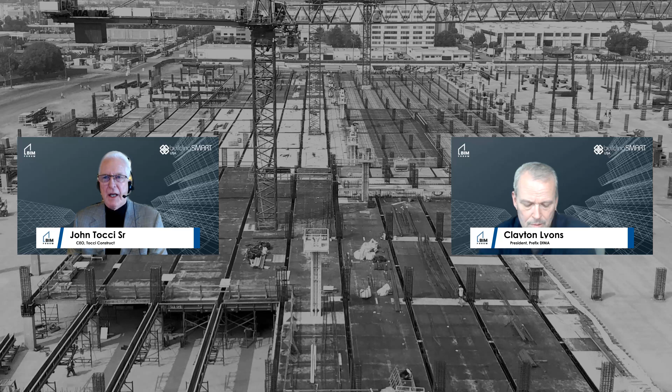So we are talking a lot about some of the case studies that Clayton has been involved in. In doing so, we want to say that this is not to highlight any one person or one firm, but this is just the best example of real DfMA that we have among several of us that have worked together with him. And with that caveat, we push on.

So this is a slide that we introduced at the BIM forum in the face of about a dozen more that talked about how badly we sucked back in 2010. And I still use it because we still haven't gotten our train, in my opinion, back on the track fully.

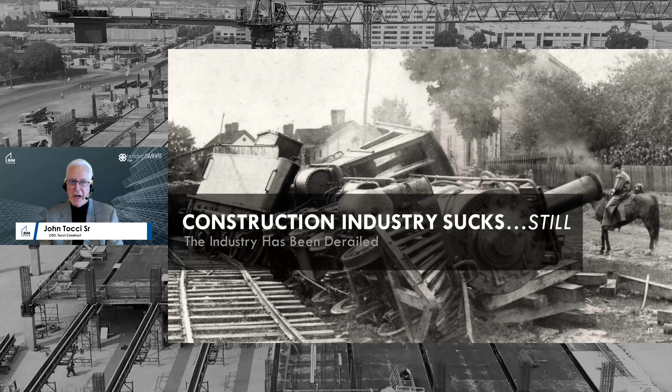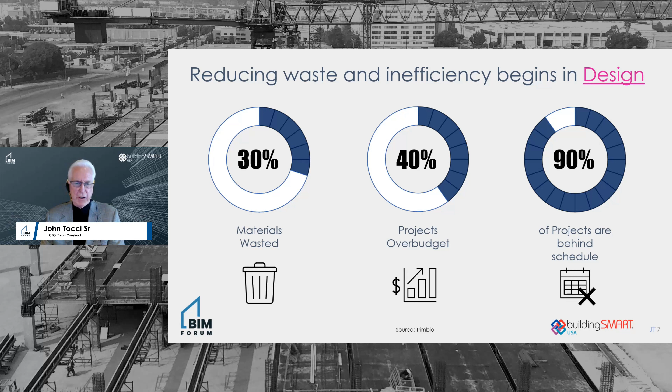This is what we're talking about even today: there's 30% waste in materials, 16% of that is actually new materials. 40% of projects are over budget, 90% of projects are behind schedule. So few projects finish at their starting budgets that it's an anomaly. So we need to get better, and this is about getting better.

So we talked at the beginning about the whole idea here being bringing craft knowledge into the design process. But isn't that means and methods, and don't architects traditionally shun getting into means and methods, traditionally thinking that architects do not have the responsibility for means and methods?

This comes from the standard owner-architect agreement, the basic AIA B101, and there's the statement right there about not having control over, charge of, or responsibility for construction means, methods, techniques, sequences, or procedures. But this statement is in the construction phase services. There is no statement like this in the design phase services.

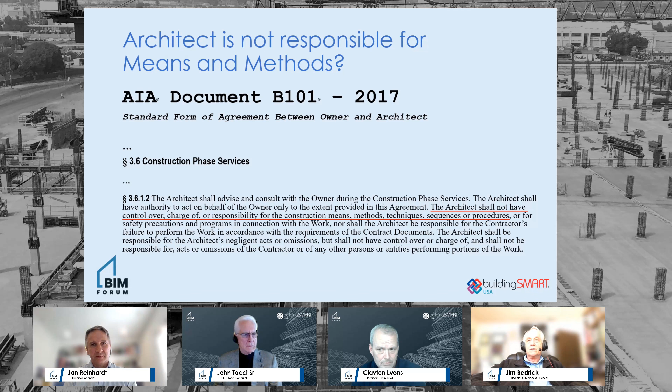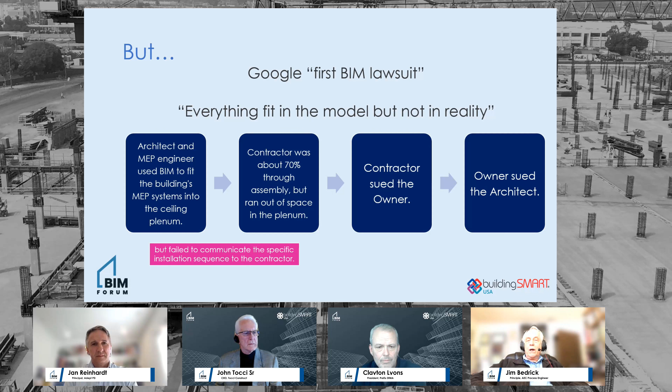So you might think that architects are not supposed to be delving into means and methods, but next. If you Google 'first BIM lawsuit,' that quote right there, you will find an article by Nadine Post from about 2011 on a laboratory building where the MEP systems were designed so tight that they could only be installed in a certain sequence.

Well, the architect failed to apprise the contractor of that sequence. About 70% through, the contractor ran out of space and couldn't get anything more in. So, following our beloved Spearin doctrine, the contractor then sued the owner because he didn't like the drawings. The owner then sued the architect, and the insurance company brought the engineer in and sued him too.

And you might think that this was means and methods, that sequence which was specifically listed in the contract above as something the architect doesn't have charge over. But the architect, the engineer, and the contractor all ate some of the judgment. So we architects and designers are already held by the courts responsible for means and methods. And that's where we want to bring the craft knowledge in, so we get the means and methods right.

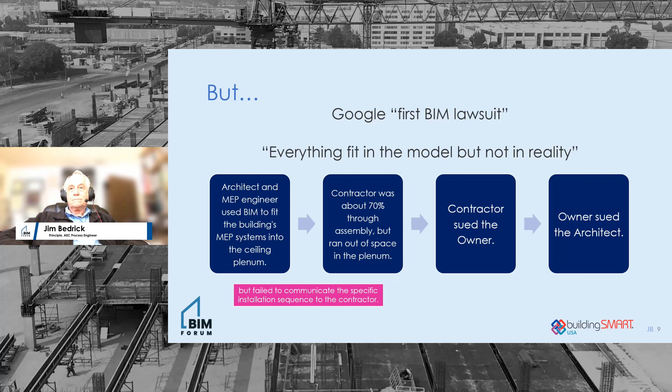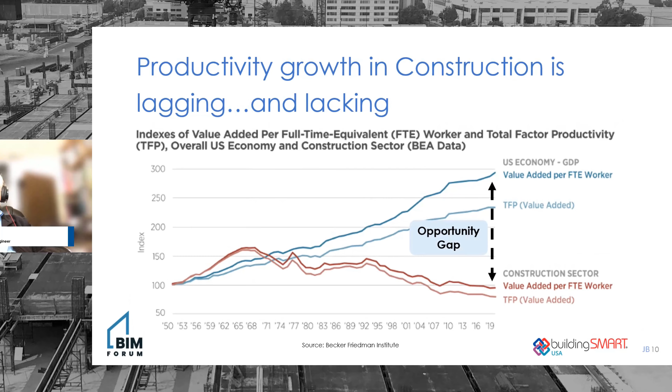We still do one-offs. Boeing will design an airplane and then build hundreds of copies, so they can invest a huge amount in upfront design, making sure that every nut, bolt, and electrical connection works. We can't. The economics of our industry can't possibly support that amount of analysis at the beginning. But there is a huge opportunity—we can certainly improve our productivity. There's a big gap here, and that's an opportunity for any company that does improve it.

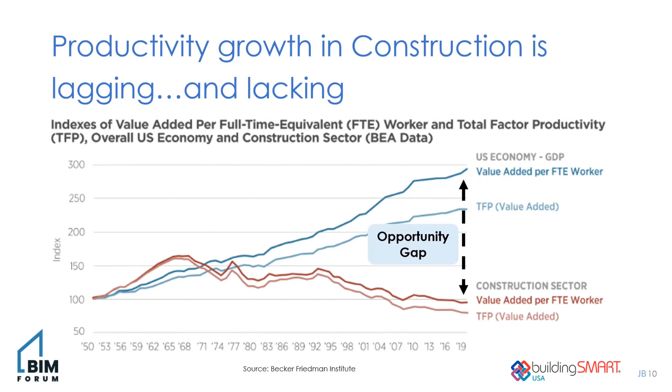The second caveat is we've all seen the traditional wisdom of cost, schedule, and quality—you can only improve two of them at the same time, you have to sacrifice the third to pay for it. But the fallacy is that this assumes we don't do anything new. If you look at productivity, that's cost and time—does that mean we can't improve productivity without sacrificing quality?

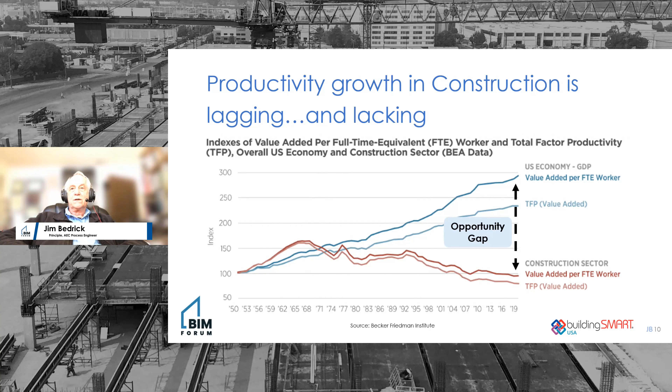NASA managed to come up with a process of doing better, faster, cheaper. That is something we can do also, and that is where DfMA comes in—it can turn that conventional wisdom on its head.

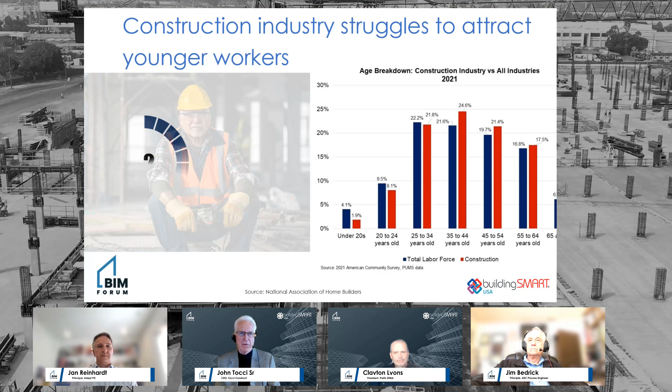So they give this to the old guy to say, a rapidly aging workforce and a strained labor market. This is really true, and we all see it and know it. It's a drain of all the experience at the craft level. Not all of it, but much of the experience is retiring and walking off of our job sites, and we're not attracting the same type of interest from younger people.

This poor guy is sitting between these two graphs and feeling pretty dismal about life. I'll let the graph speak for itself because we're talking too much and we've got to get into the meat. So this is good.

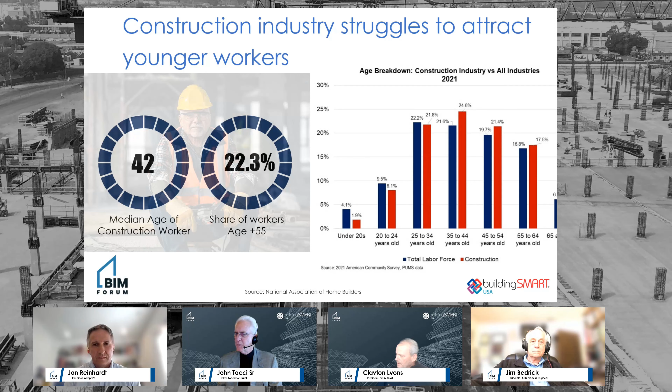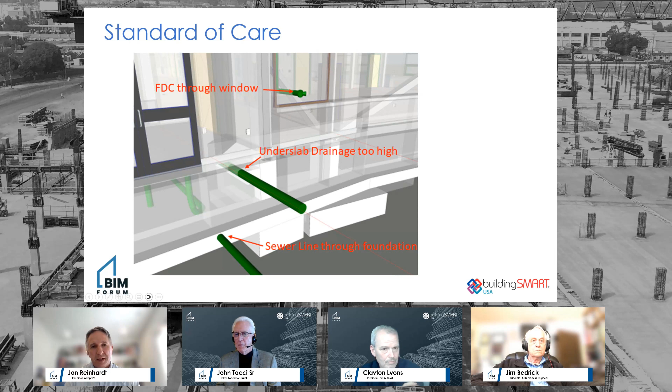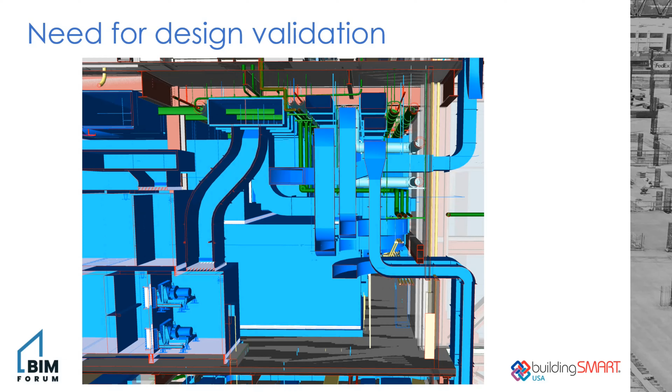That design wasn't constructible, but it's also definitely not optimized. And the quest before us is to see how can we optimize things at the right time, when it's easy to do. This is what we are exploring here today.

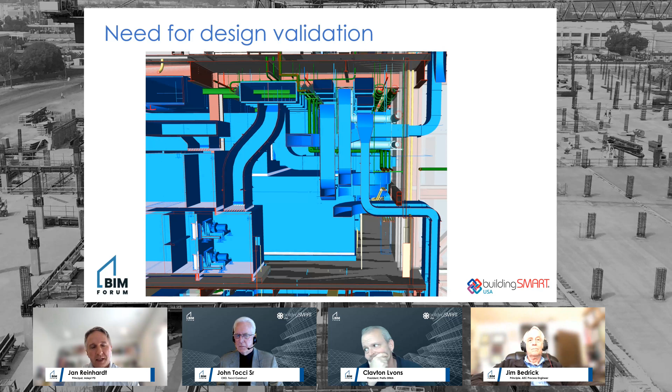So what the heck is DfMA? It's design for manufacture and assembly. It's the combination of two discrete standards, design for manufacturing and design for assembly. It's an industry agnostic design approach that prepares and optimizes components for streamlined manufacturing.

Think manufacturing informed design, which is becoming another acronym, MID. Think about looking at design through a filter at some point, earlier rather than later, about what parts can be prefabricated, what parts can be aggregated into components, and how much of this work can be fabricated offsite where it's safer, cleaner, smoother, and more efficient. You'll have captured most of the essence of DfMA.

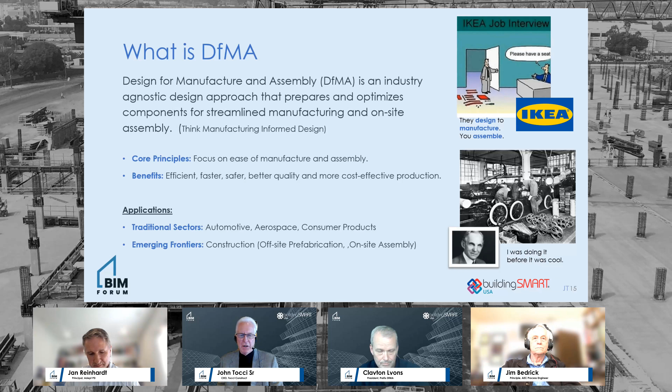We know it every day in all of the manufacturing sectors. Now it's coming to a project near you. DfMA, I'm going to keep, even though my name's not on it. Okay, DfMA reduces design effort when it's done properly.

Craft specialists infused into design in late SD at the latest, throughout design development and into CDs, help make decisions, choose parts and pieces, fittings and hangers and clips, all the things that are important that need to be in a complete design.

So this is a little example of a DfMA approach on one hospital project. Clayton, why don't you talk about the setup that you encountered and that you improved? Hold on, let me take myself off mute first there.

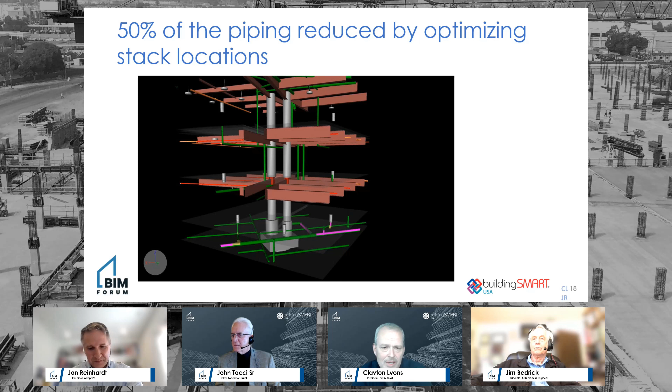So go to the next slide, Mark. We can start talking about some of the things. So we embedded with the design team on this project, an A&E firm, and this was the original, early SDs, late SDs, DDs. We started to integrate, incorporating value coordination, which is one of the things you want to incorporate into your drawings, getting more horizontal or leaner piping system.

In this case, it's a giant plinth, a lot of curves to the building structurally, curtain wall wise and everything else. As we were going along, we were able to remove 50% of the piping on the plinth areas, which is 3 levels, and 31 potential RFIs per stack. Then, of course, a total of just in the plinth area, 900 potential RFIs.

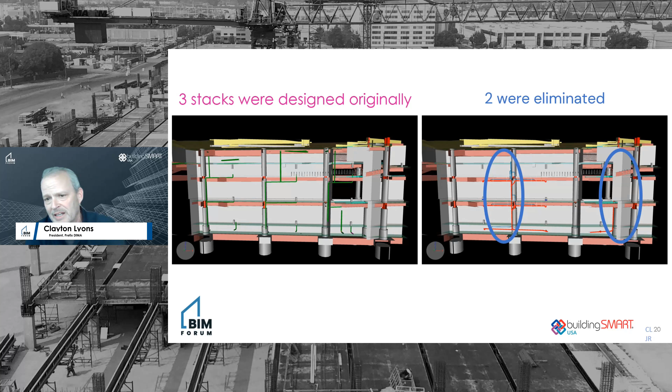I want to jump to the next slide. As you can see here on the left side, we had 3 original stacks. We went with individual venting, eliminated 2 stacks, which you're seeing on the right side. This is all before the subcontractors are on board. When the CD sets, this was incorporated into the design CD set, and that's what the subcontractors estimated off. So it created a much leaner and shop drawing ready process.

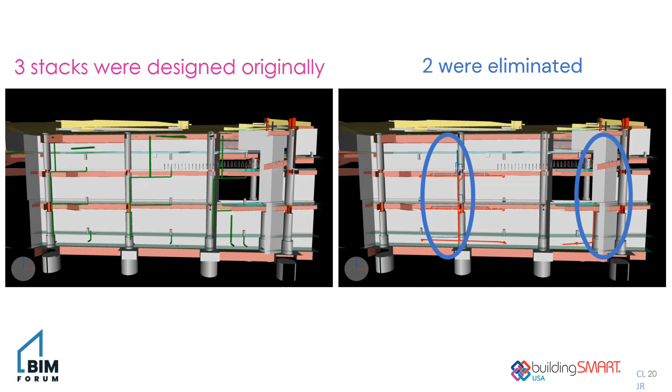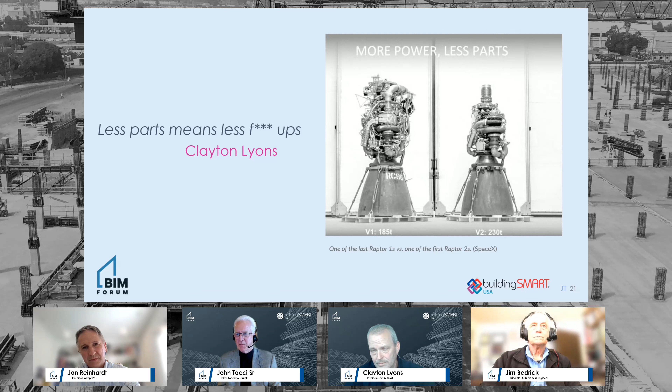That goes back to John. Okay, so what you're seeing here is 2 versions of the Raptor rocket engine from SpaceX, version 1 and version 2. This image captures one of the essences of DfMA: fewer parts, leaner, fewer things to go wrong, in Clayton's language. Go ahead.

So the core principles are infusing craft knowledge into the design process, fewer parts, aligning component tolerances with manufacturing capabilities. Let's try not to design things that can't be built unless you really have to. And then simplify assembly, group assembly, and find a way to make it so that it can only be installed one way. Lefty loosey, righty tighty.

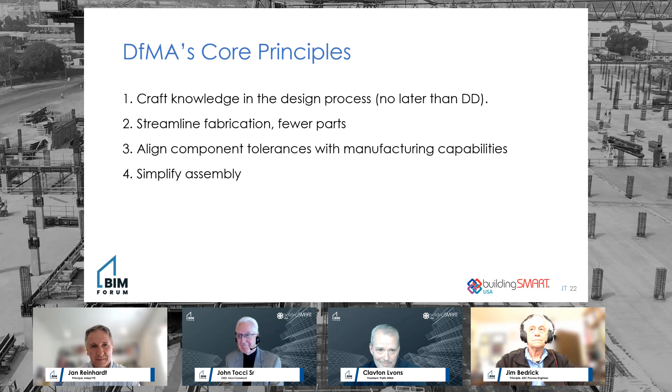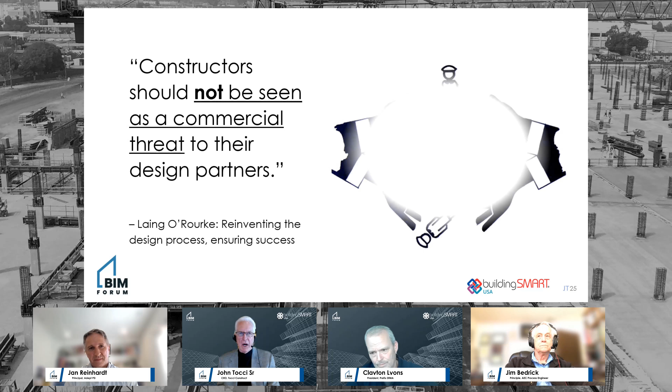So it really is about collaboration, not competition, especially with the design team. We're not criticizing, we're complementing and completing.

So now where are we taking that with DfMA, John? With DfMA, you're doing it even more intentionally. Another cliche that has developed is we need to go slow at first to go fast later. So we drag, or rake, that effort forward. Whatever can be pre-designed, whatever could be thought through, whatever can be detailed accurately in a way that doesn't have to be redone because of some proprietary system or extrusion or other part or pieces. Anything that you can do to design with good practice and as complete as possible is what we want to do, because we will improve the overall performance dramatically.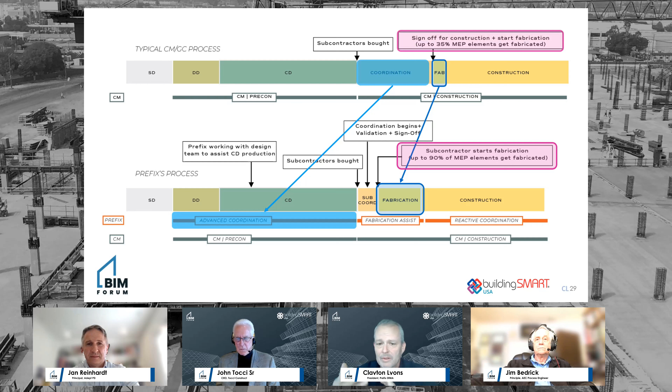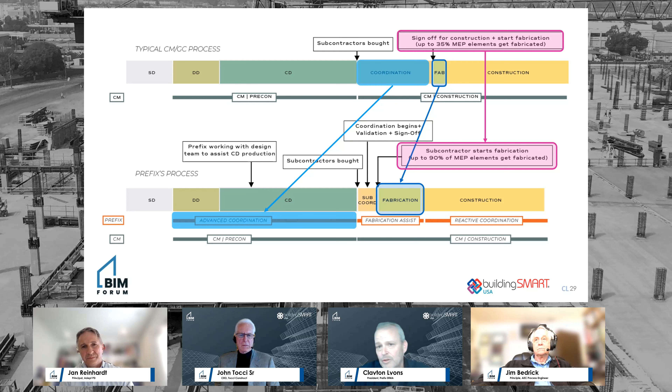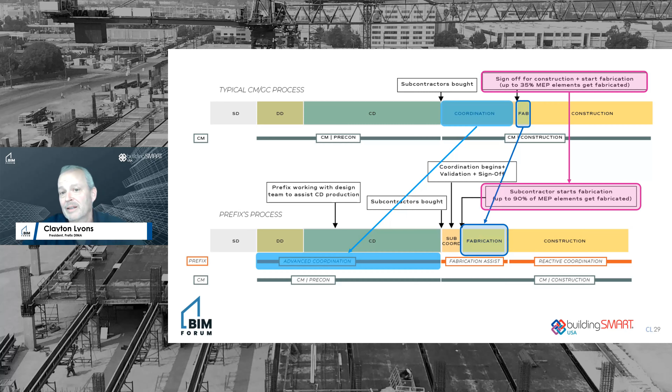The bottom is what we're performing now, where we're taking in vetting with the designers, the architect and the engineer, as part of their team. And in parallel, we're creating a set of fabrication level or shop level drawings that we can go out to the subs on purchasing. So on the bottom chart, you're now looking at the subcontractors to purchase. We've got a longer, bigger fabrication stage, and construction can be pulled back in a couple of months. So one of the biggest things to call out here is fabrication. It's offsite, and it's a third less of the man hours required than doing it in the field. So if we're doing a third less labor on 35% being fabricated offsite, and go up to 85 to 90% fabricated offsite, we're looking at a much better going out to bid, getting the owner the price that is incorporating that one-third reduction in labor.

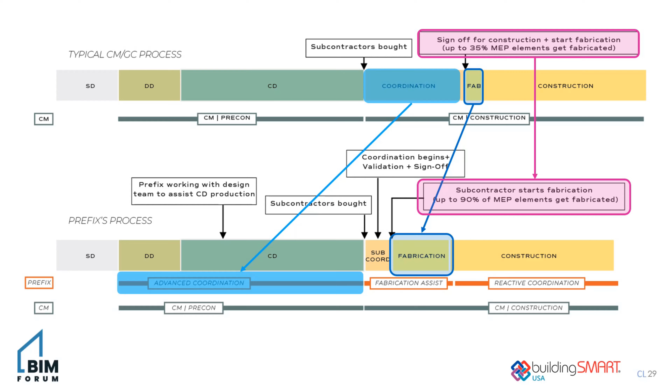Fantastic. And as Clayton mentioned, these are really important methods, and they're used in other geographies around the planet as well, specifically in the UK, Northern Europe, and the Nordics.

One really strong example of using this method is Laing O'Rourke. About 10 years ago, they made the decision to commit to DfMA and stated that they wanted to achieve targets of using 70% of the design elements using DfMA as part of their process. They wanted to reduce labor by 60% and shave 30% off of overall schedules. And to the best of my knowledge, they've actually accomplished that.

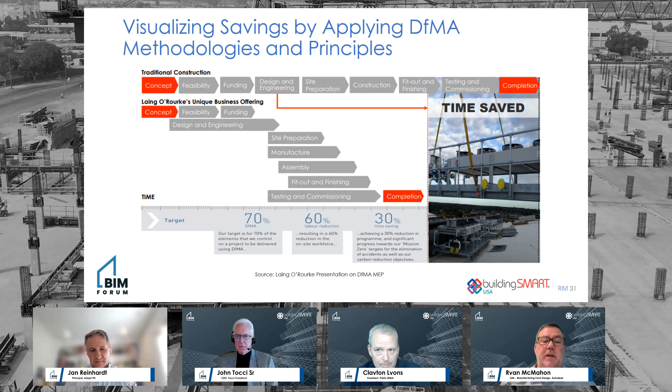They built a $200 million factory in the Midlands in the UK for precast concrete panels and components. They can support a huge amount of variation of each one of these elements, but all of them follow specific manufacturing rules and have very clear constraints so that they're always known manufacturable. And in their process, their designers have to seek to use these predefined components as part of any design solution, and they have to get an exception to go outside of using those regular components.

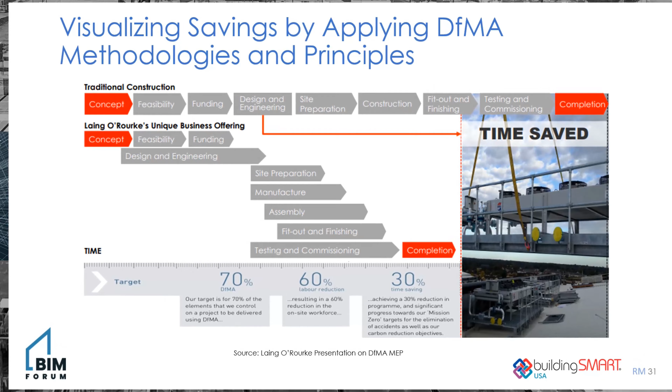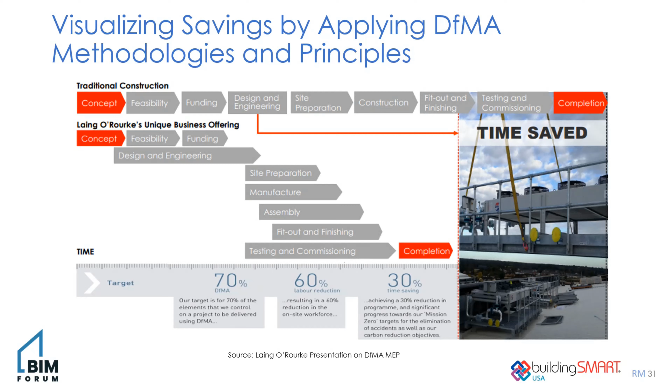And in this way, they've achieved these objectives that they called out here. Laing O'Rourke is one really good example, and you can see all kinds of stuff on the internet about what they're doing and see videos of their factory. But there's plenty of other examples. Goldbeck and Max Bogl in Germany are doing similar kinds of things and getting similar kinds of results. Another couple examples are Mott MacDonald and Royal BAM in the UK as well, and there's a ton all over the place. And now we're going to dig into another example.

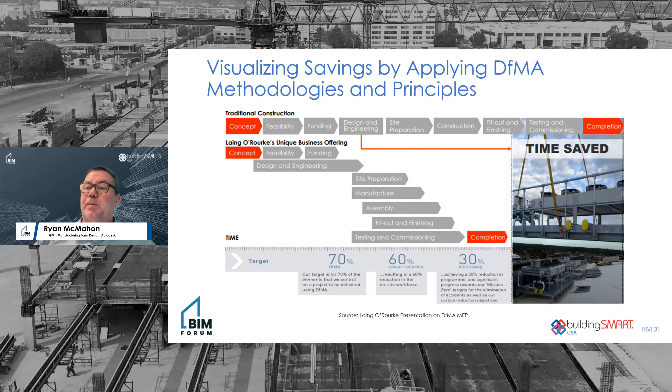So let's go back to the East Coast. This is our hospital project that we started to introduce. And what I want to say also here is there is no rocket science to this. This is traditional software. These are skills that are available. We just need to configure our approach, how we execute this project so that we take advantage of these opportunities.

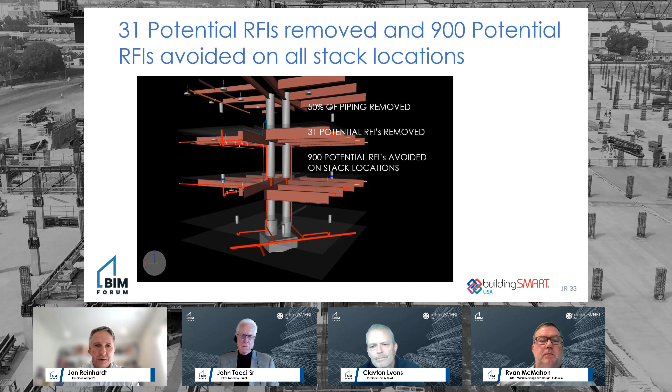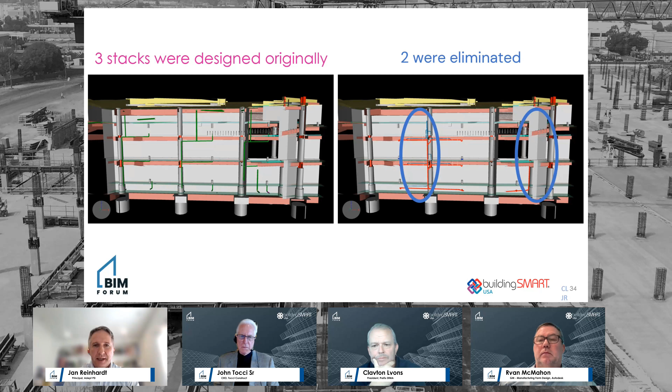The savings that were accomplished on that particular project are significant. We've looked at that at the beginning. We'll go through here. Clayton, why don't you continue talking about that project? And also, just so you know why Jan's talking to that, he was actually there.

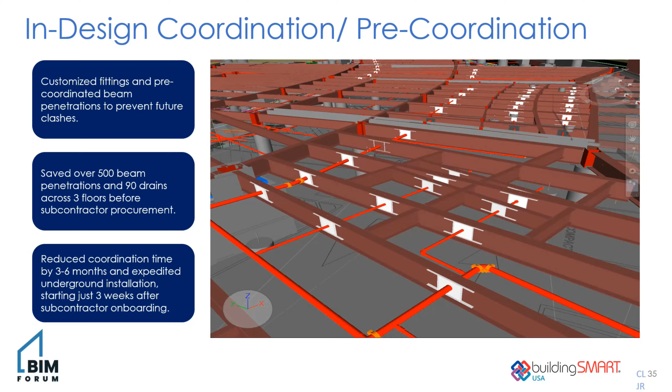So one of the things, we saved 500 beam penetrations. There were like 800 beam pens that were required. This particular building has 5 different curves to it, structurally and curtain wall wise, where it presented some really heavy challenges. So for fitting a dry system into the lower levels, in order to hit the beam penetrations that were needed, we would have had to have about 30 drains per floor for swing joints. What we ended up doing in order to keep it straight was we mitered a 45, welded on 2 grooved ends so that we could get 1-2 degree bends and stay level and pitch.

So let me interject here. The significance really is that this all happened at design time, right? This was at the time when you could buy beam penetrations for a penny and where you had all the flexibilities to make changes to the structure. Correct. No structural subcontractor had been purchased yet. We're still just getting into late DDs at this point. So we're able to actually fill in some of the gap on design.

So this is what ends up going out into the architect and engineer's copy, into their CD set. Now we're going out to the street much leaner. So this is what—can I just add something, Clayton?

Yeah. And that is that this is what we're talking about, infusing craft knowledge into the design process. Most designers didn't even know that they had a problem. In fact, most CMs didn't even know they had a problem. But the craft knew that this was going to be a problem because you needed drains at each one of these locations, and you were going to have a serious issue in this. But bringing the craft in, dropping it in like a parachute at the right time, solved the problem that people didn't even know they had.

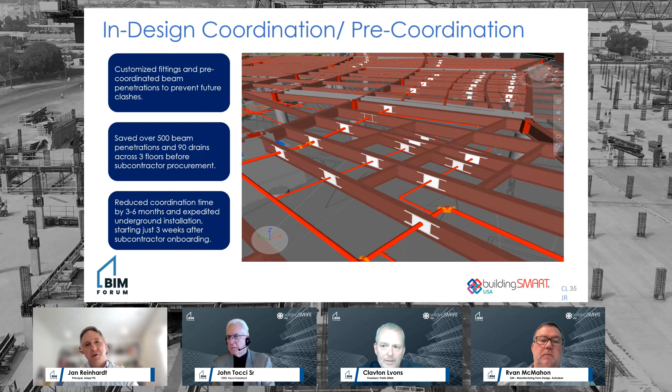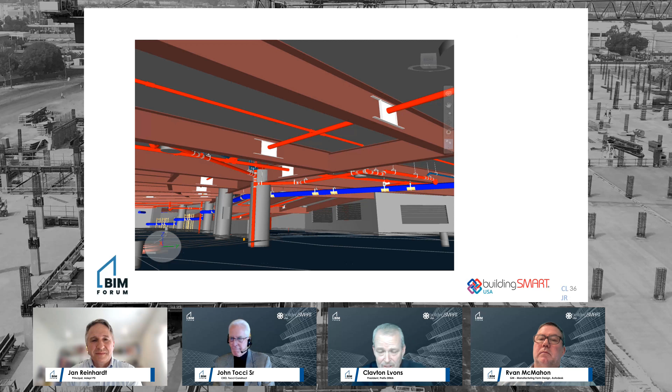In the traditional process, we will never know how expensive it is because we buy it expensive and we never compare. On this particular project, we actually upsized 60 beams in order to keep the drive lanes, and that was prior to the steel subcontractor purchase as well. But this is what goes out to the subcontractors to look at: the hangers, the nuts, the bolts, and then they take it and they go into installation. So we're purchasing them much cheaper, and we're also, because we're doing this, we're incorporating value coordination.

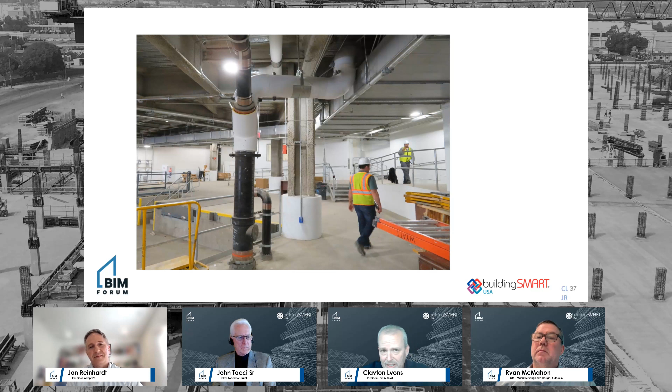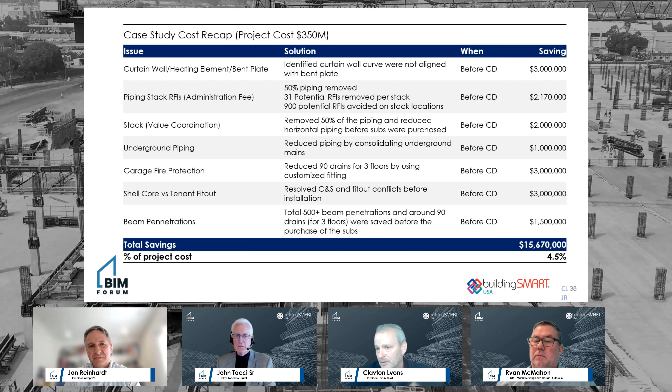Value coordination can yield much greater results than value engineering can. In this case, these are the things that we fleshed out on this project with bent plate, because it started off with curve plate. We suggested, because of the way the elements—the fin tube and everything that was in the curtain wall—that we go to straight 5 footers, 7 footers at each knuckle, underground piping. So total cost, 4.5% upfront savings on the GMP. Next one.

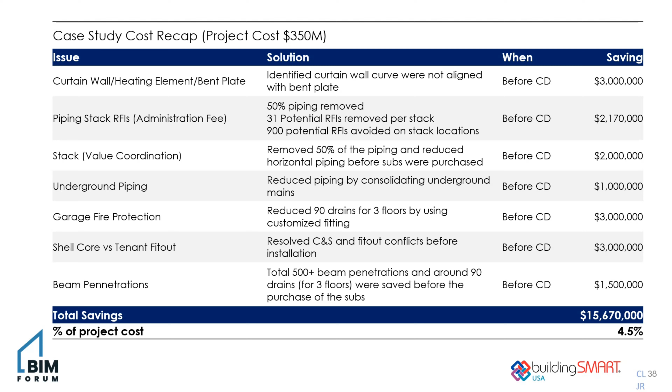What did I go to soon?

Okay, we're going to talk quickly about a case study that is currently under construction. This is a Tocci project in the Boston area, about $110 million project, 250 units on 3 stories of podium, with a robust program, mixed-use program underneath it. Go ahead, next slide.

What happened here was piping was redesigned and rerouted. We eliminated all dropped ceiling requests and requirements, and we even eliminated bump outs in corridors and around units. Reduced piping by 25% across 3 levels, prevented change orders, eliminated delays. In fact, the project is running 7 months ahead of schedule.

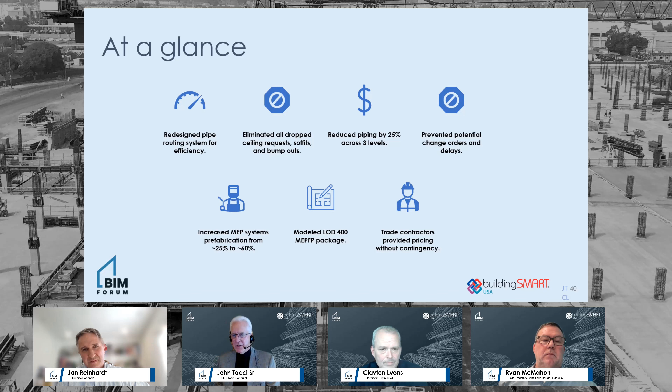We increased MEP system prefabrication from 25 to 60%. Our goal is to get it higher. And we modeled to LOD 400. And no contingency was tapped. So how did this happen? We do have a magic project, Mr. Tocci.

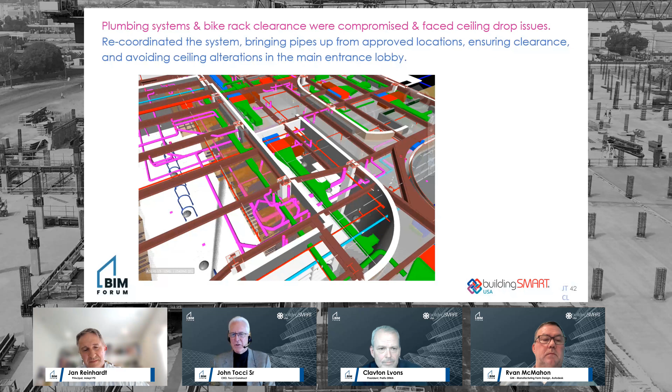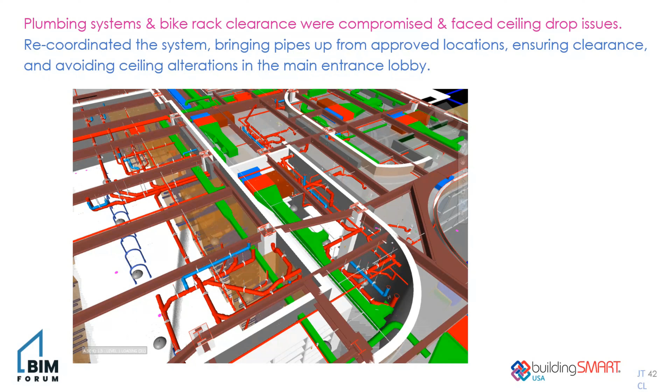So it's the standard spaghetti and mess and crowded interstitial spaces. We don't need to go into the details of it, but the difference between DfMA and regular coordination is number 1, when you do it, and 2, how you do it. It is done with the thought of optimization, not just straightening out a bowl of spaghetti. It's to question how much of that spaghetti do you really need. I realize I'm using kind of informal language, but it really is true.

Overall the project, and we're showing you one of the better grouping of bays, but across the entire building, we reduced piping by 25%. One of the key elements there is the fact that on the left, they wanted to drop all the ceilings. That's correct, and that was a battle for a couple of months. And then we changed the underground in order to... I'm glad you mentioned that, because that's what I was going to say.

It's not just moving pipe around. It's thinking outside the box. It's bringing the craft in. And by the craft, I'm not talking about VDC, as much as I love VDC. We're talking about people that actually know how to hang pipe and actually know what you need and where it drains to and what the code requirements are for drainage and drainage area. In this particular case, the outlets were revised, the underground was revised, everything was revised and optimized. So getting rid of stuff is actually more important than putting it in the right place or a convenient place.

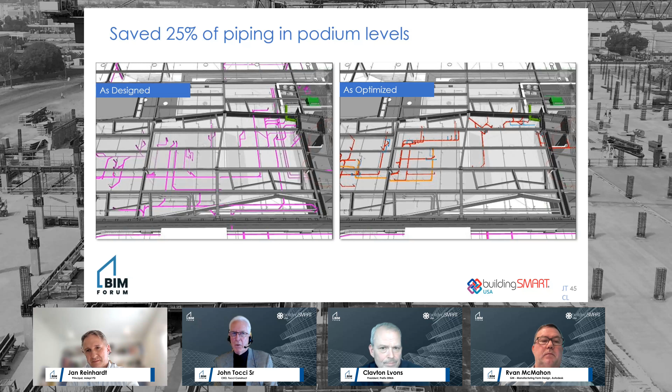And the boost on the schedule. Yes, the boost on the schedule. So this really brings up a quote that I love by Peter Drucker: there's nothing so useless as doing efficiently something which should not be done at all.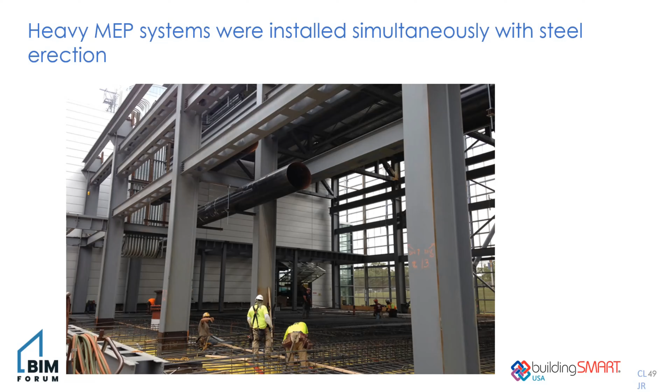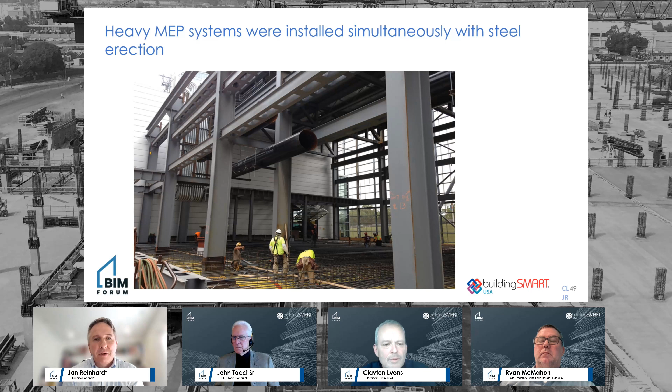It's just another angle. Go back to that slide if you don't mind. That looks so innocent, but for experienced people, this is significant to have the pipe coordinated, know where it needs to go. We can use the right equipment. This is big, and we had the MEP coordination moved forward 6 months, and we were able to use the right equipment, put it in the right sequence, and realize all these benefits. And if we had coordinated 6 months later, all these positive ripple effects would not have been able to materialize on that particular project.

All right, you're looking at just a different view. You go to what's being installed.

So like he's saying, we're quite a few months ahead of schedule, which when you move your MEPs 4.5 to 6 months ahead of schedule, you're looking at work in place, you're looking at cash flow, there's just so many different things. You're looking at the elimination of the second crane to hoist this stuff in place down the line.

Yeah, okay, right. But it's testament to how inexpensive it is to install it when you do it at the right time. Everything's ready to go. All the hangers were set into the deck when the deck was getting placed. A couple slotted there. You see the electrical.

So every project presents a different attack plan to make things happen. But ultimately, when you get rid of all the BS that a project has when it gets into the coordination phase, and we can get everybody hitting the ground running with shop level drawings out of design, that's the key element of getting fabrication. You can't fabricate unless you're done coordinating.

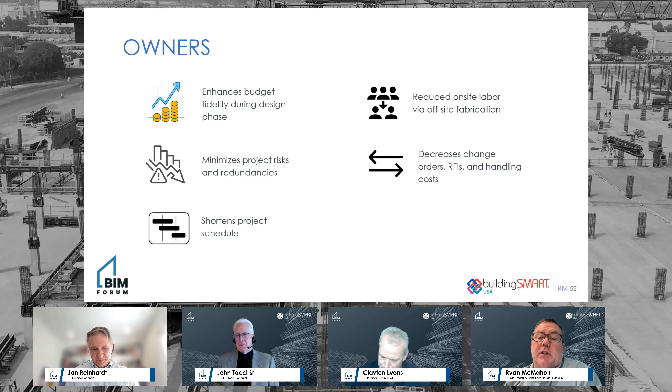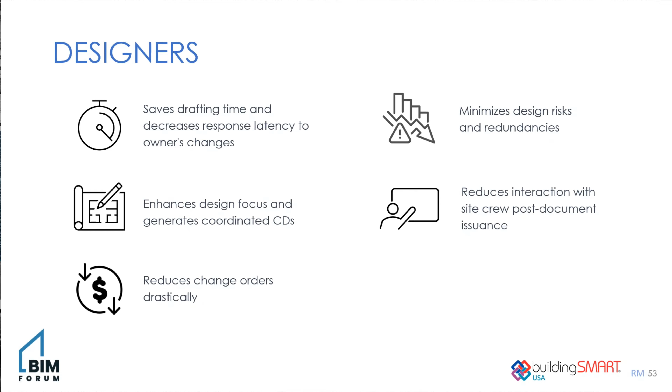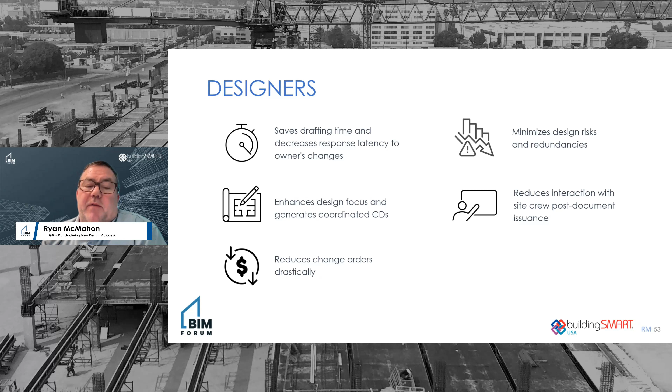For the designers, there's a misconception that DfMA can impose constraints on designers and architects, and the opposite is actually true. When you make design choices informed by what can actually be made, when that craft knowledge is applied early, you have the most opportunity to impact the design in a positive way and change costs downstream. So it saves time, it enhances design focus and generates coordinated CDs. It reduces change orders and overall project risk, and it provides clear and accurate information to the site crew to minimize errors that happen there.

Next, please. And so CMs and GCs, I'm a little dyslexic I guess, generally benefit when design decisions are more certain earlier in the process. And so by incorporating fabrication knowledge earlier in the process, we prevent mistakes. It reduces change orders and handling costs. It can eliminate the shop drawing process and reduces on-site labor by using offsite fabrication capabilities. And it allows process and material optimization to reduce physical waste.

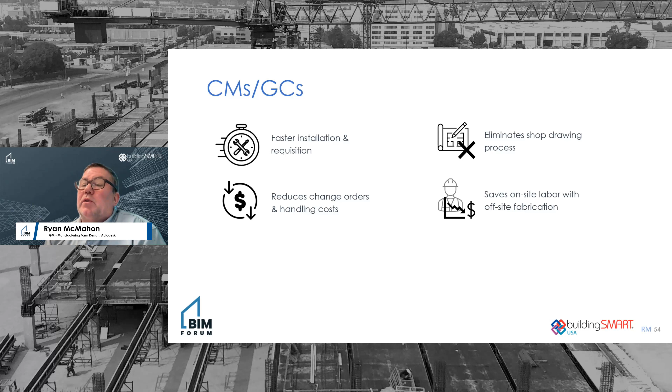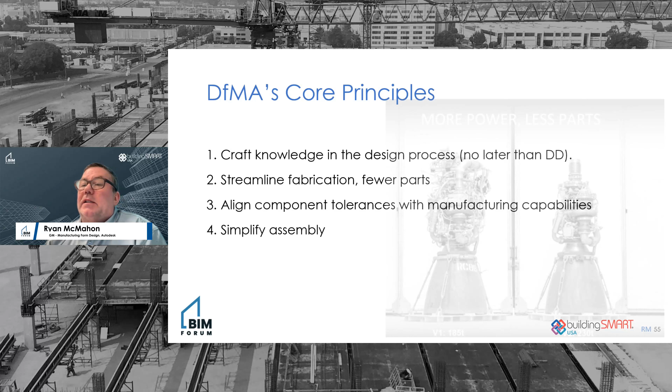All right, next slide. So let's wrap up here today and talk about revisiting the core principles of DfMA. Using craft knowledge earlier in the process ensures design decisions are more certain, critically important to the general principles of DfMA. And streamlining our fabrication processes to use fewer parts and reduce physical waste is also a significant benefit. We need to improve product tolerances and overall quality by taking advantage of the manufacturing capabilities, the different things you can do in the manufacturing environment. We have an opportunity to take full advantage of them. And lastly, we can simplify and accelerate the site assembly processes. All right, so that's our core principles.

Secondly, review your current processes. Where do you have repeatability? Where can you bring your craft knowledge and introduce it earlier in the process? And how would you do that?

And when you're using offsite fabrication capabilities, what could you change if you could scale, if you could reduce your waste, if you could improve your processes? How would that impact your business? It's worth going through that thought experiment to understand how this could impact your business positively.

And lastly, just try something, apply it to a small project or benchmark a new project against a previous project with a new method and prove it to yourself. The benefits are significant, and it will be obvious when applying these new methods the benefits that you'll gain.

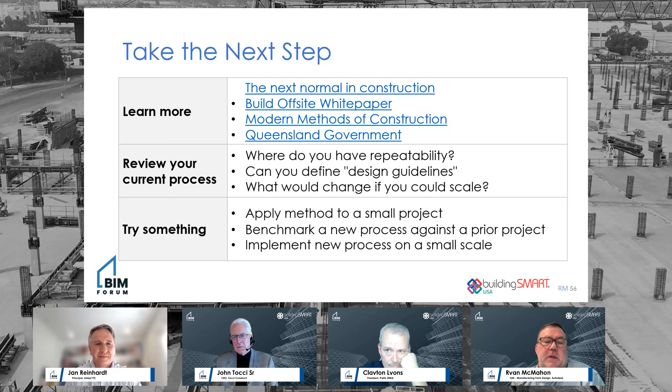All right, so that concludes the main part of the presentation. We want to provide a teaser for the second episode in this event, where we'll be talking about DfMA techniques, the software and tools, and application of these techniques going forward.

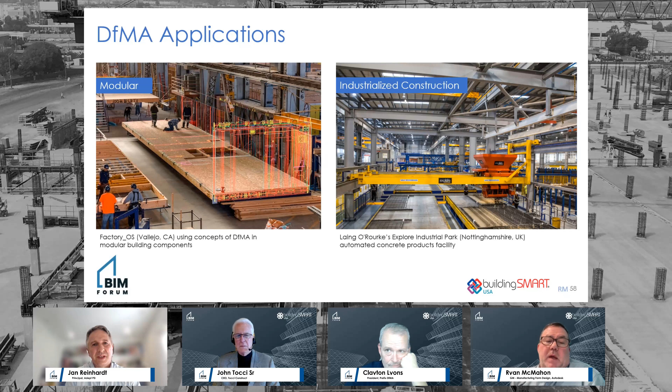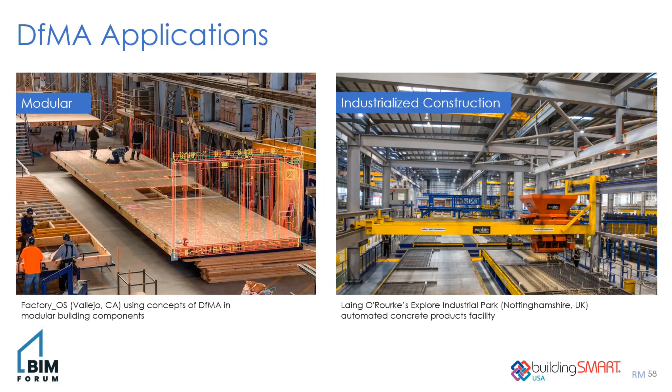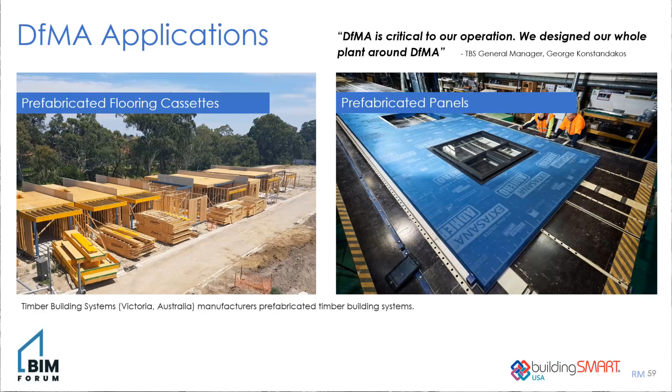So what we will be talking about is how do we apply these methods to different kinds of project methodology, different kinds of offsite fabrication and prefabrication? How do they relate to industrialized construction? And then we can also explore the breadth of application: how these methods can be applied across everything from timber-based construction to creating exterior wall panels in a factory, and everything in between. We can talk in a little more detail about what that means for our customers.